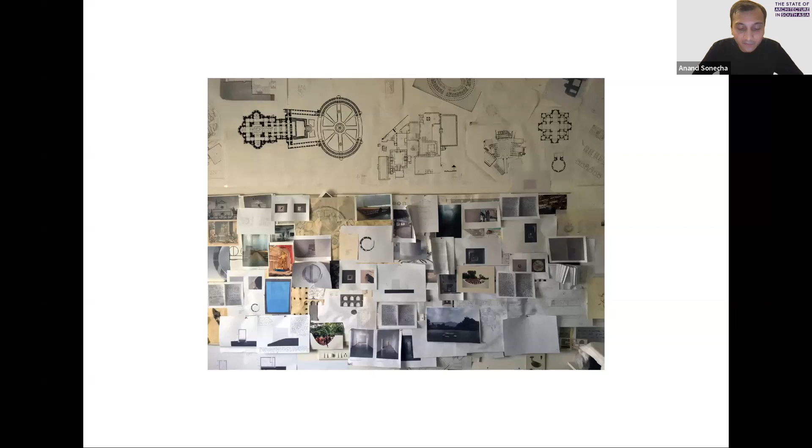Our architecture practice began with projects in the historic Sabarmati Ashram in Ahmedabad, where Mahatma Gandhi lived and led the struggle for independence for 13 years, from 1917 to 1930. Manav Sadhana, an NGO based in the Ashram, gave us our first opportunity. This was the house where Mahatma Gandhi lived, Hriday Kunj. In 2017, we built a small theater, a place for performances for children, as part of 100 years of the Ashram.

With this project, we had an opportunity to work in a complex historical and natural context. We worked with frugal resources, built a simple place, striving to be open for all, young or old, rich or poor, where one can be together or alone.

I will not present this project in detail today, but some approaches and learnings from this project remain consistent in our later works, such as frugality, building the essential, rigorous engagement with the place and people, working slowly, and a quest for beauty for everyone.

Today, I'm going to show two projects: a School for the Blind and Visually Impaired Children, and a housing for a community in Wastal that we completed recently.

Blindness is a spectrum, and it is rare that it is absolute. Only 15% of people with blindness see nothing at all. The majority of people who are blind perceive light and color, while those with different impairments have varying degrees of usable vision. Approximately 39 million people are blind in the world, and India accounts for 20% of the population who are blind, which is around 8 million.

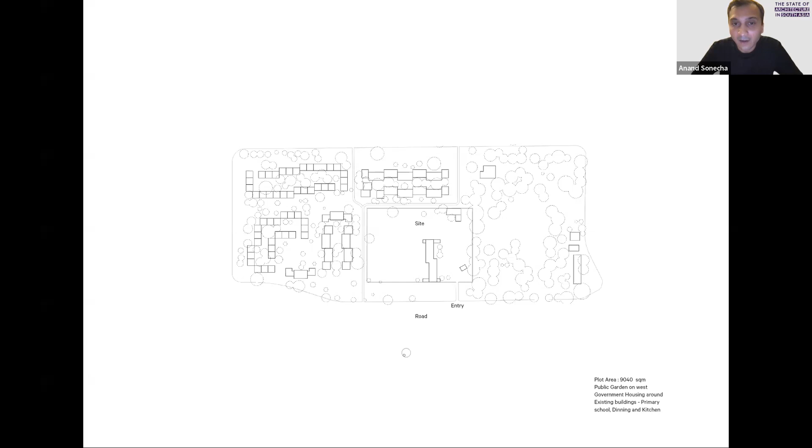On one side, on the west, there was a public garden, and around it were the government housing.

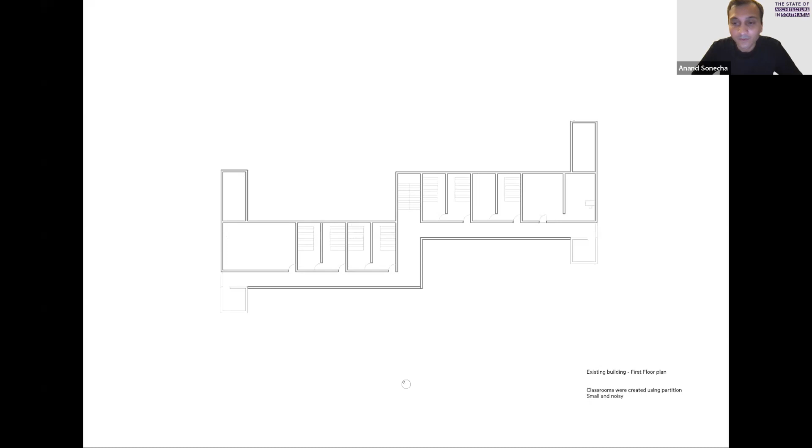This is the existing plan of the existing building, where girls and boys lived on the ground floor, where in each room there were 12 to 14 students living, and it was very inconvenient. And the school ran on the first floor, where classrooms were created using partitions. They were small and very noisy.

So the brief was to design a new school with 10 classrooms, a music room, and renovate the existing building into hostel facilities for blind children to live comfortably. In addition, the hostel facility aimed to invite young students studying in Gandhinagar and senior citizens who live alone, for a mixed community living.

The location that we got had very large dimensions, 81 meters by 57 meters. And there was this existing building on it. And we got this project in 2015.

We didn't have many references of schools. There are some schools designed specifically for blind children, but we didn't come across many that could be a reference. So we started very intuitively with ideas of linear movement with no edges, or a school in a contained garden which is safe and accessible. These were some preconceived ideas that started this project.

We were also thinking of classrooms as individual cells, because the budget was a constraint, so it could be developed incrementally. I was also thinking that if each classroom could have a different character, different shape and volume, it could bring different light and experiences for the children.

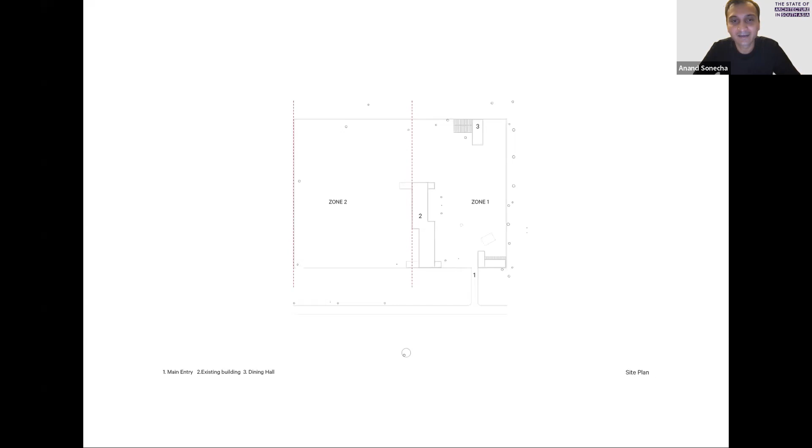After I came back to India, I re-looked at the project and restarted with these new learnings. Some ideas remained consistent, but new ideas also emerged, like the contained garden with movement space around it, which I felt was necessary because of the size of the plot - so students wouldn't get lost. I also started looking at the movement spaces at different scales.

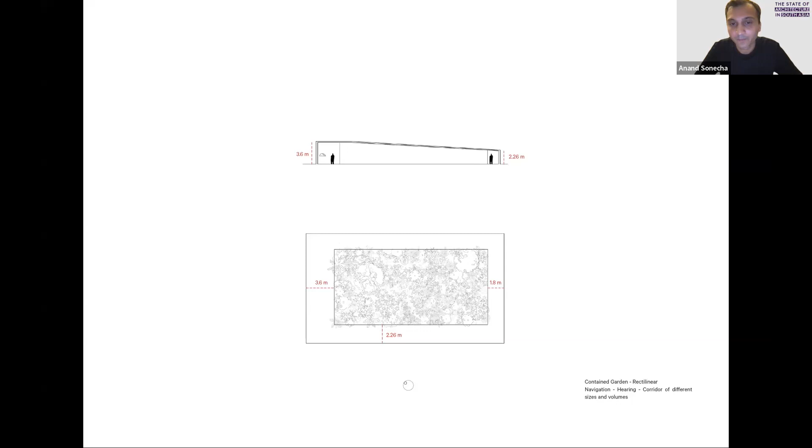So the volumes at the entrance created a wider corridor with a wide and tall height, versus the opposite - a very narrow space with a low volume - that could create a very different sense of sound and echo when students move, because they use clapping as a way to navigate spaces.

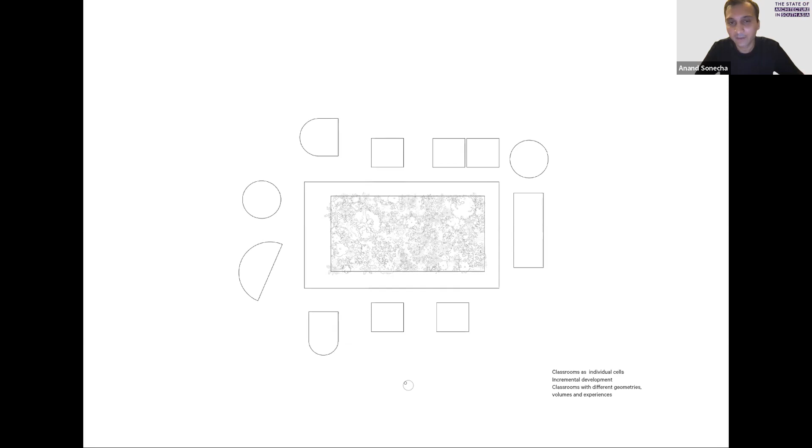Also, the idea of classrooms as cells, which could be incremental, built over a period of time, that remained consistent, but with different geometries and different experiences.

So the project is a very simple geometric building, which revolves around a central courtyard, where there are special classrooms which have a lower ceiling height and the light being brought from the top.

And there are other classrooms which have private courtyards with specific plant species, each with a unique character of its own. Also, the corridors - we were thinking of treating them with a different colour so it can become a point of identification for students.

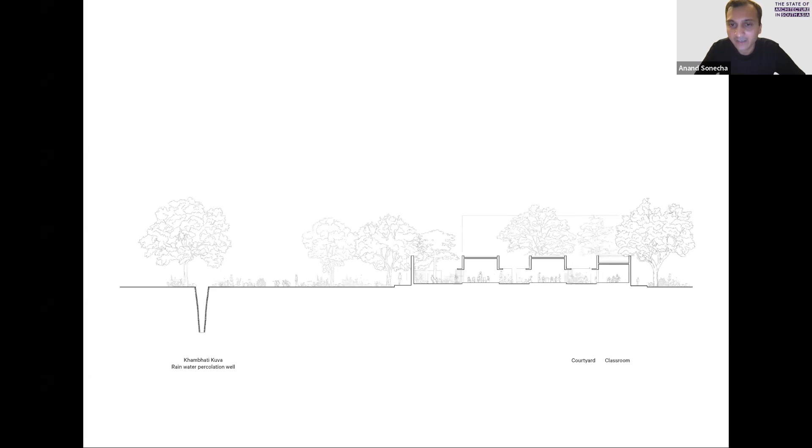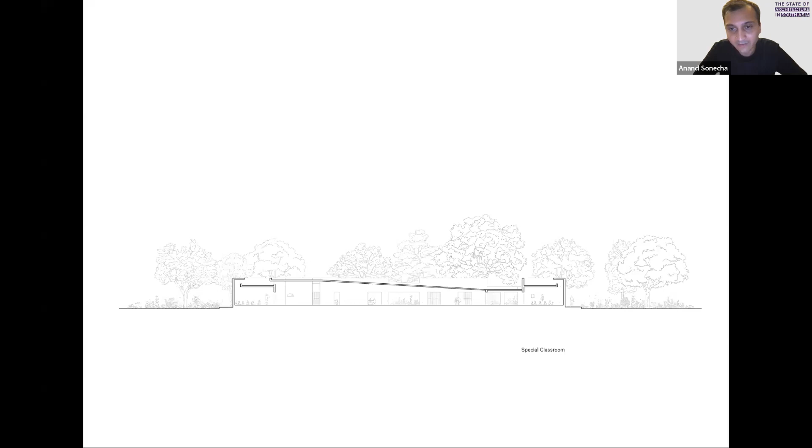This is the section through the special classrooms I was mentioning, where the light is brought from the rooftop, and the entrance corridor gently slopes down to a narrow and smaller side on the opposite end, which creates a very different sort of experience for students.

You can see there are very few openings on the periphery of the building. The openings you see are openings to the courtyard, because diffuse light was very important for low vision students - they get really affected by direct light, and it could become very uncomfortable for them. So there was a constant effort to think about what would be an appropriate light condition inside the classrooms.

We also thought that light could be an element which also gives signs. For example, we thought that the entrance of the special classroom could be a tall volume where light is brought in as a light shower, so it creates a contrast on the surface where students can also perceive the entrance of the classroom.

Whereas we also thought of light as a focal point, that where it also guides you towards, it attracts you towards the other side.

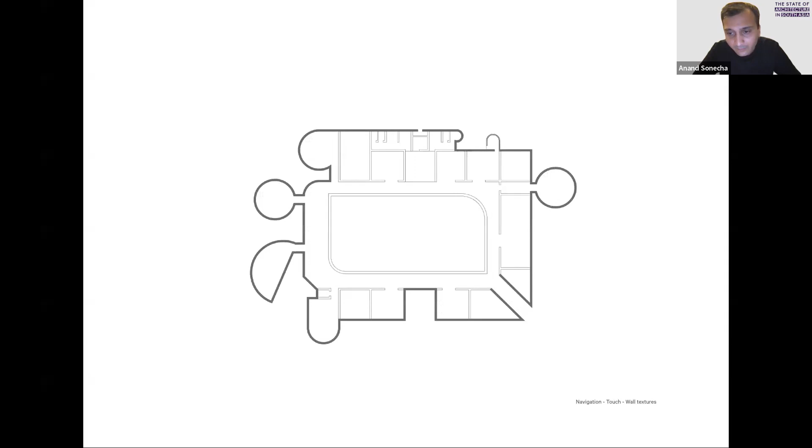Wall texture also became very important for navigation. On the entire periphery, there is a sand-faced plaster, so students can understand the spaces outside and inside. Whereas inside has a different texture, the classroom wall adjacent to the classroom has a smooth texture, whereas the courtyard wall has a semicircular texture. This is a contained open space, so there is a difference. Students can understand the difference between the outside sand-faced plaster versus this.

In which direction the student moves, that was another question. On the horizontal longer surface, we used plaster with longer grains, whereas on the shorter side we created vertical textures, so students can identify whether they are on the shorter side of the built form or on the longer side. These are the textures that we tested out on site, with great effort from the contractor. We made several samples, students tested them out, and we could get accurate grains after a lot of testing.

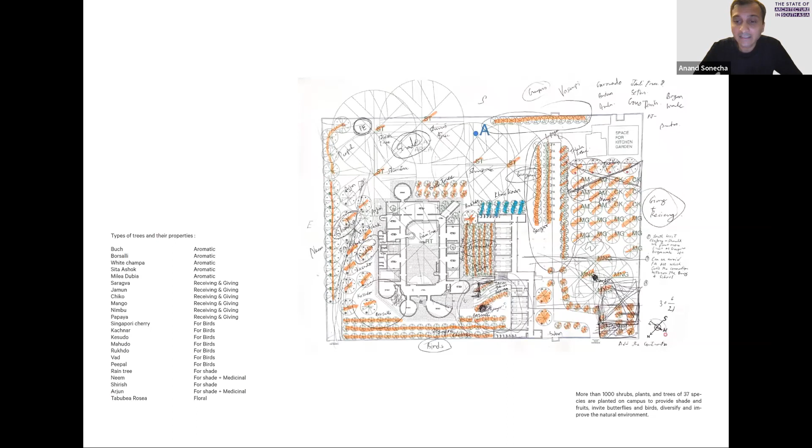Landscape was also another important strategy. Lokendra Balasarya was the landscape architect for the project, and more than 1,000 shrubs, plants, and trees of 37 species are planted on campus to provide shade, fruits, invite butterflies and birds, and diversify and improve the natural environment. Each classroom opens to a private courtyard with aromatic plants and trees, and aromatic trees with specific foliage were selected for the courtyard to allow natural light into the classrooms.

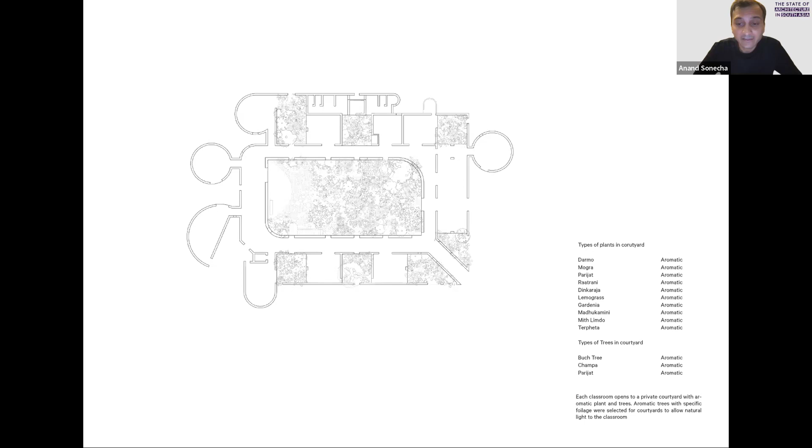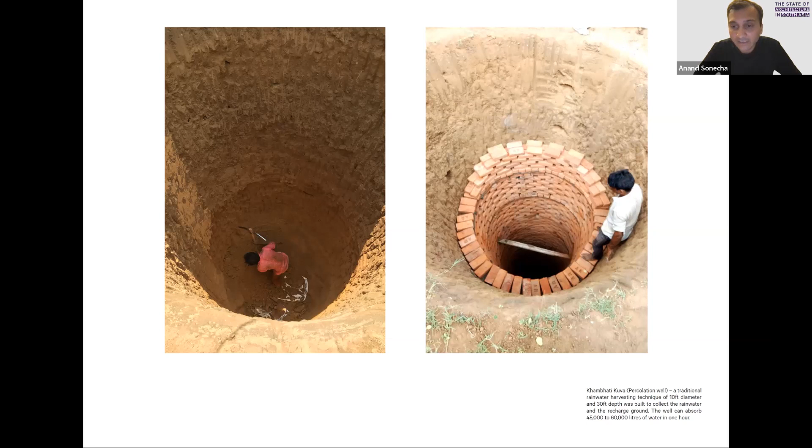I'm going to show now a few photographs of the school, although I feel that this project needs to be experienced in person. These photographs do not give a very clear understanding of the experience of the place itself, but I'm also going to show some speculations which might help understand how students would experience the space. I'll just describe one photograph in detail, then go quickly through the others.

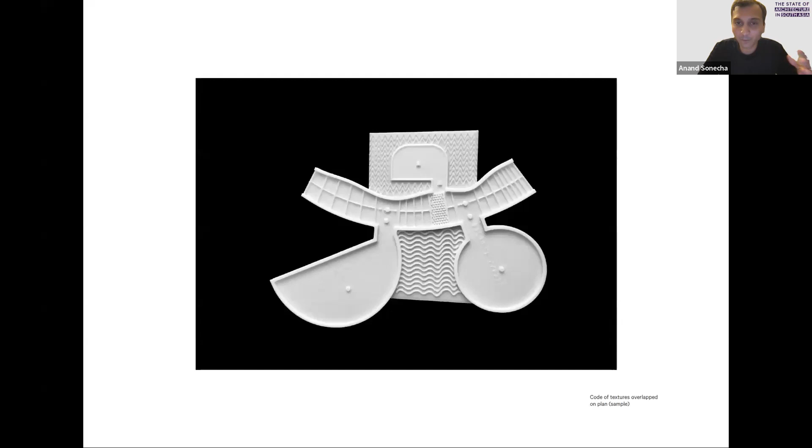Communication was something very important for us in this project. Initially, we started with communication using cardboard models with teachers and students, but they had difficulty understanding the interior spaces. So we devised a code of 3D printed textures which we overlapped onto the plans, and tried to create tactile drawings. There were a lot of trial and errors we did with the students to make sure they understood the spaces we were trying to create.

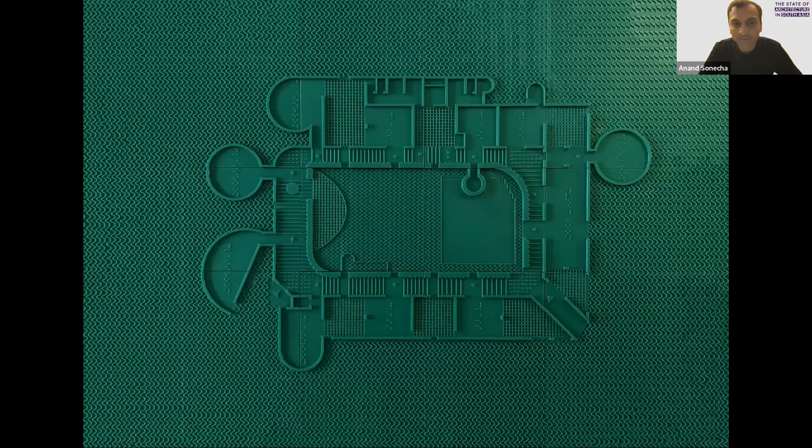We also understood that students are very scared of cardboard models, afraid that they might break. So we made these 3D printed models with furniture embedded, so every detail could be understood by students and teachers of how their classroom might be. And this is the latest drawing that we made.

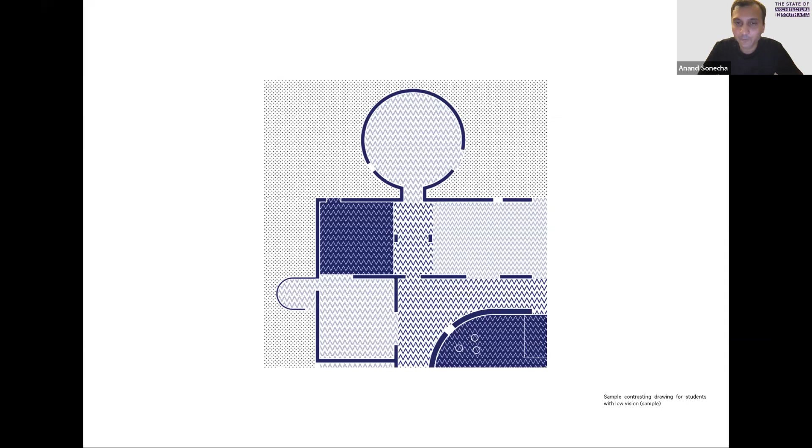We also tried out different contrasting patterns and colors for students with low vision. These are some sample drawings we created for students with low vision. Of course, these are still work in progress and need more studies and research, but we were trying out if this could be helpful in the communication process.

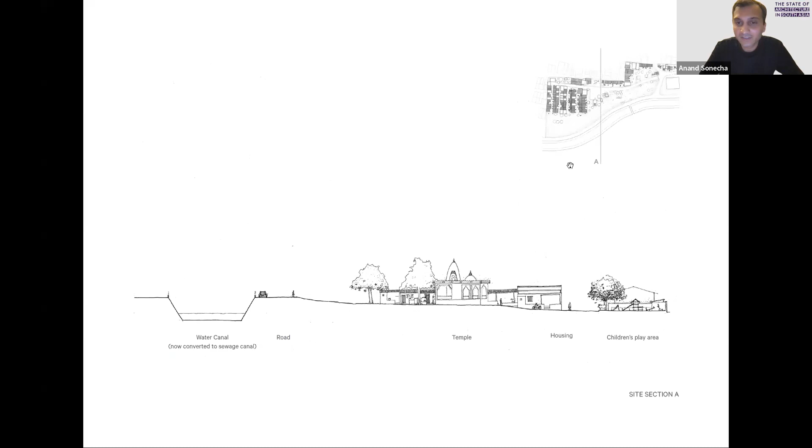Earlier it was surrounded by farmlands, but now due to newer development and surrounding compound walls, this whole community has become like a saucer. So this is the plan, and the major housing is here, and the slope goes towards this side, and there is a huge compound wall which has been developed, and it doesn't let rainwater go away.

Just to give a sense, the community is located in Vastral, which in 1968 was an outskirts. Now it has become part of the Ahmedabad city.

So people from the community identified 55 houses which needed immediate rehabilitation. With the lottery, we have built 13 homes in the community, step by step, assessing, learning, and improving from each one. Each home has been designed uniquely with rigorous engagement and dialogue with the end users, understanding the aspiration, number of family members, and occupation.

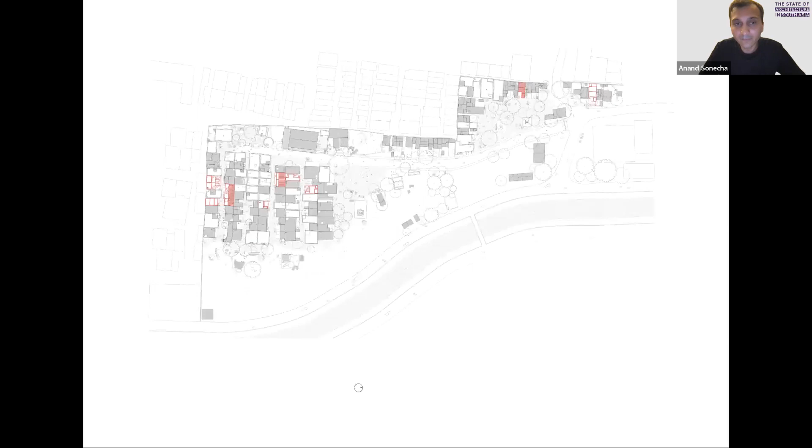These are the houses that we have constructed, but I'm just going to show two to give a sense about the project. Some of the design concerns were: houses need to be flood resilient, should have natural light and ventilation, should be incremental. We needed to engage contractors and fabricators from the community itself, and build the house with a budget of 4 lakh rupees.

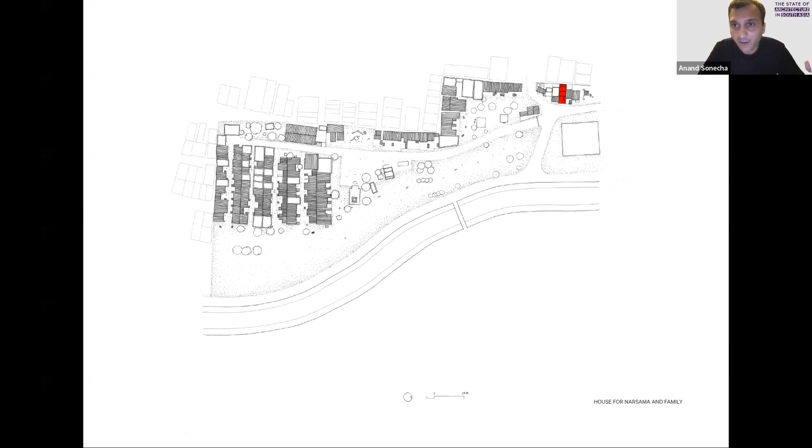So the first house that I'm going to share is of Narsama and her family. She's a widow living with 2 children. This was the house with 1 room, no natural light and ventilation, with an asbestos roof. In the section, you can see how the levels were and how it was flooding.

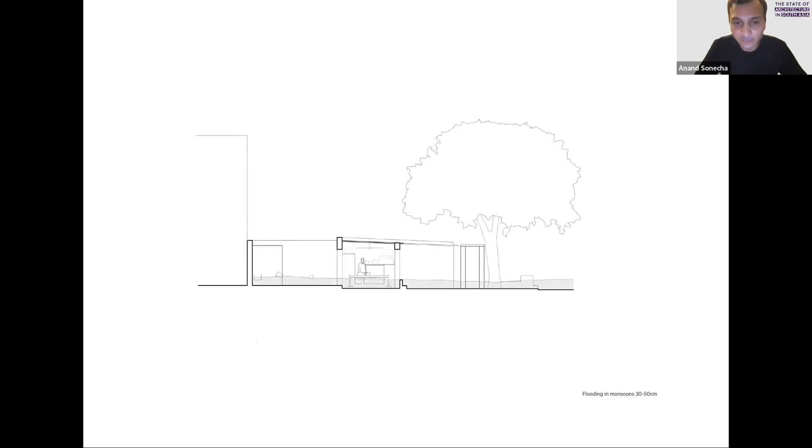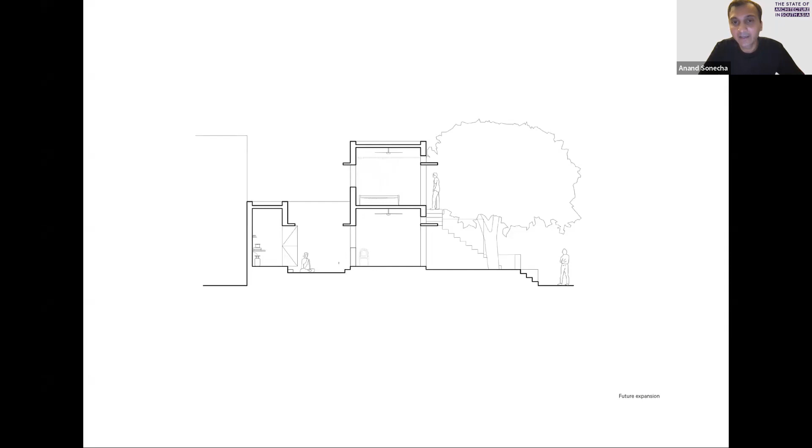So the first thing we did was demolish the existing house, and with the debris of the existing house, we built a higher plinth of 90 centimeters. We built a small room where she can sleep, a cooking area, and a courtyard. We built the foundations in a way that invested a lot of money so that it could be built one story above.

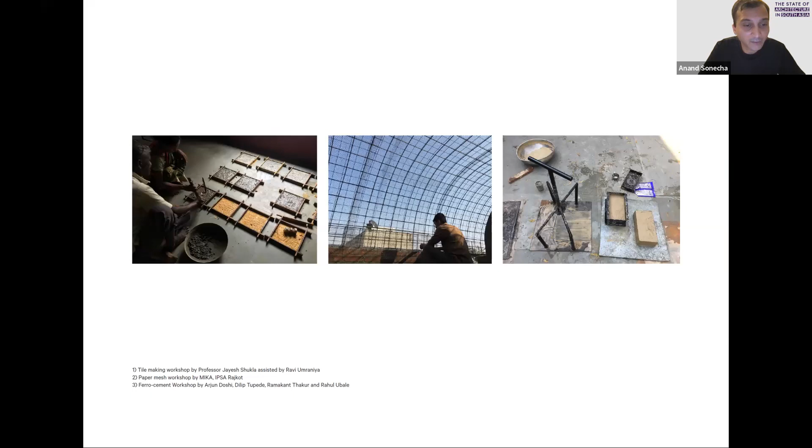We also organized 3 skill development workshops with help of different professionals. Professor Jayesh Shukla and Ravi Umraniya conducted a tile making workshop from waste marble dust. We also invited MIKA students for a paper mesh workshop, and Arjun Doshi for a ferrocement workshop.

I'm not going to go into much detail, but these are some of the sample tiles, where people from the community also learned, and together we used some of the learnings in making of the houses.

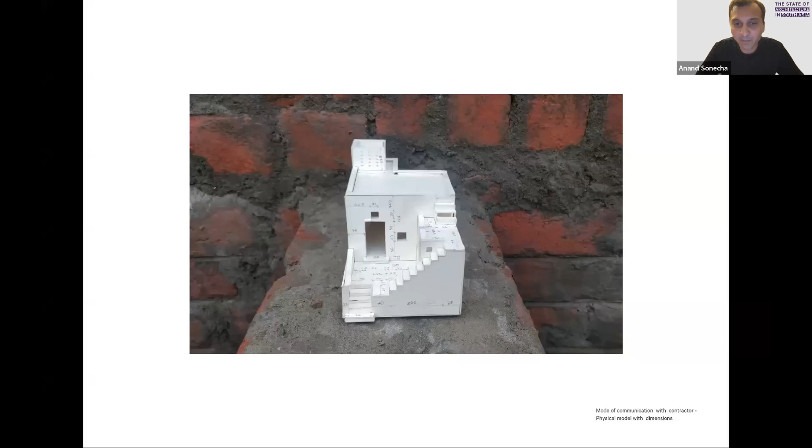Another thing I wanted to share is a change in communication technique. That contractor we were working with could not read architectural or working drawings. So we made models with dimensions, which helped ease communication. This was a great learning experience as architects, that we have to work with all kinds of contractors and find easier ways to communicate.

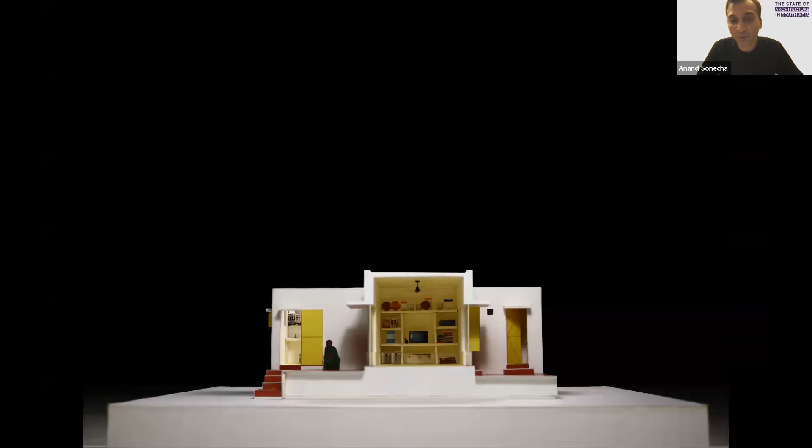Each design was debated and discussed in the community, and these are some of the photographs. We also, for ease of communication, photographed the belongings of the households and showed them.

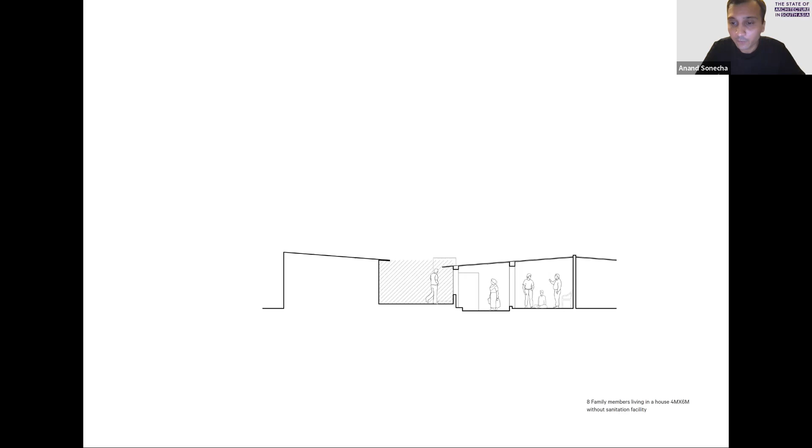The second house I'm going to quickly show is the house for Aruna. The condition of the house was like this: it was below 30 centimeters from the street level, which was 1.8 meters below the road level. There were 8 members living in the house in an area of 4 meters by 6 meters, without any toilets. So our first step was to build a 2-story structure.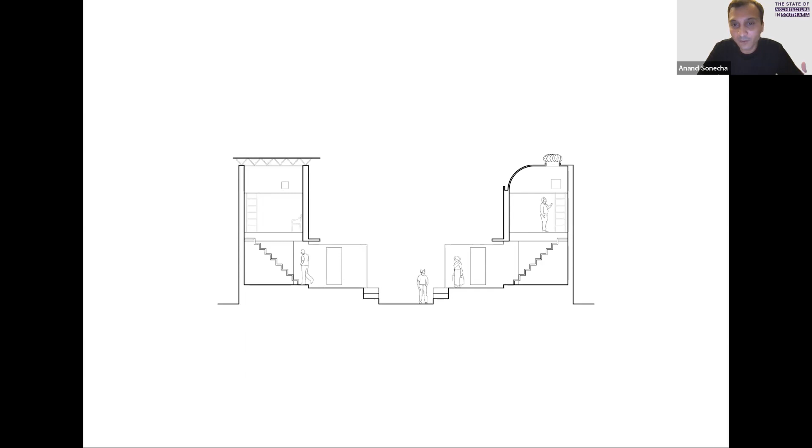We created an open space in front of the street because we didn't want to change the scale of the street. We built a ferrocement roof, staircase, and a loft where children could sleep. When the neighbor also expands in the same way, the character of the street changes too. These are some photographs of the construction.

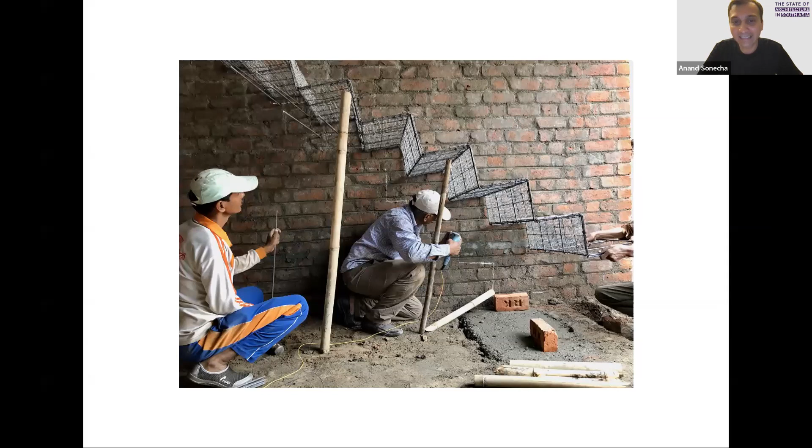Arjun was very generous; he came and taught us this technique, and we were able to build this house with his help. This is the loft, and this is the staircase made from ferrocement.

To be very honest, the grandmother of the house didn't like this house at all, because she related it to a train, since the roof was curved, and she related these doors to industrial sheds.

These are some photographs of the other houses we had built. I'm not going to go into detail here. I just wanted to show these around so one can understand that each house has been thought through according to the needs of the family and the size of the family.

I want to end this presentation with this quote from Naguib Mahfouz for the housing project: 'Home is not where you are born. Home is where all your attempts to escape cease.' And I wish that the people of this community feel this as their home.

I also want to acknowledge the fact that nothing can be done alone, and these are the people who were involved in making these projects. Thank you very much for listening patiently.

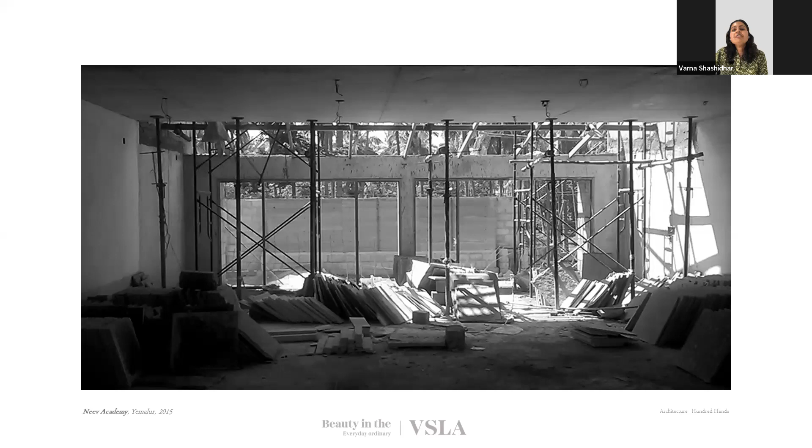While landscapes in India are atmospheric and actually touch the chitta, or soul, the reality of urban landscape and space that landscape architects encounter every day is based on densities and property prices. These were the remnants, the space we encountered in the design of Neev Academy, a school situated in Bellandur in Yemalur, located on a 0.5 acre, very, very small site.

This was a primary school designed by 100 Hands Architects, and the amount of open space left as part of the landscape was actually very, very limited. So the idea was to really look at education as creating a series of micro environments that the children would encounter—a series of grittiness and infrastructure, rather than experience with nature or anything more profound.

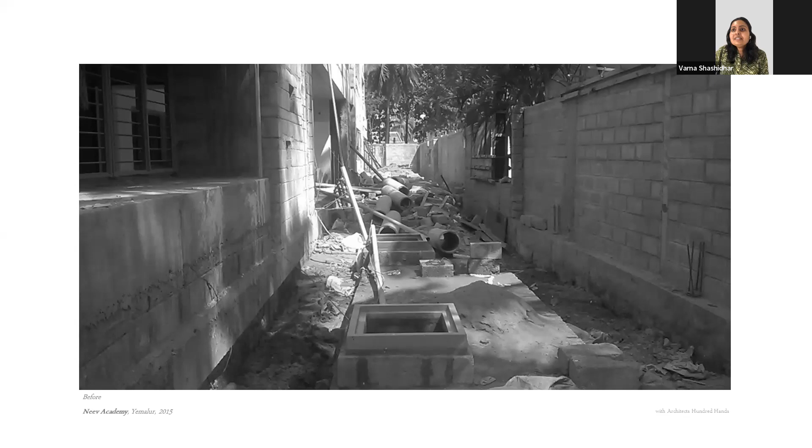These were the setbacks, the open slivers that were part of the design. The idea very quickly was to create these environments that the children would encounter. There were 4 or 5 different environments based on what they observed daily—this was an aquatic court, which provided an entry into the school, with a shallow depth of water, creating an aquatic environment that would also form a didactic space for the children.

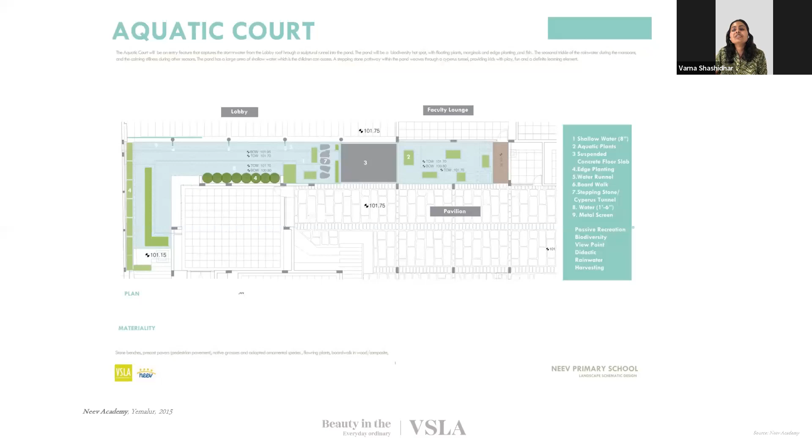There were ideas of creating a dry stream bed that worked with ideas of physics, and children would encounter the space as a landscape of engagement. It would also teach them physics in terms of fluidics and different mechanics of dealing with water, whether it was a rotating wheel.

The sheer complexity of constructing my first landscape in a very tight environment involved working with craftsmen and local material, in this case Chapadi or gneiss rock, creating an environment that would operate when the children operated a hand pump. It would teach them about these ephemeral qualities of landscape, but also serve as a teaching tool.

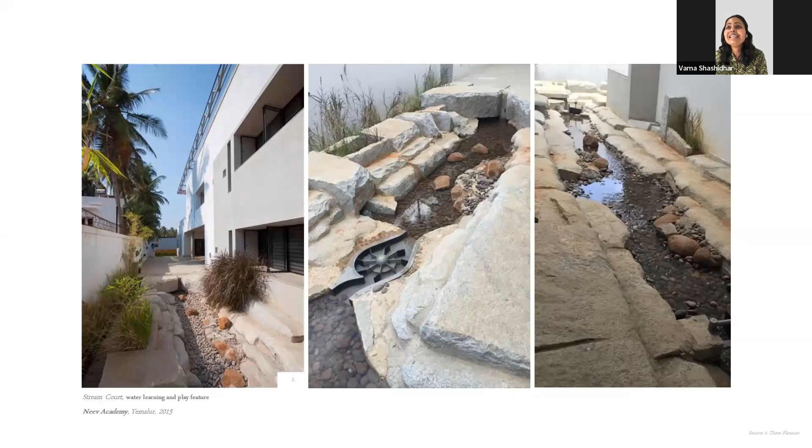The challenges in this project included how to negotiate bringing in 100-ton blocks of stone, and how to deal with the kind of timelines India encounters. It was a project that had to be built in 3 months, negotiating the logistics as a first project while creating a didactic and ephemeral environment for the children.

This is briefly how the children encounter these landscapes. There's also a desert courtyard, and courtyards that take you through an edible garden and various environments which become part of their syllabus, and also something they encounter and learn from daily. The whole school works on the idea of permaculture, and although it's a very tight environment, the children have the opportunity to partake of and really encounter the landscape.

The second project I would like to share is a public project, Bangalore International Center. It's located in a very dense environment, in Domlur. It's a remediation landscape, and the site is just about an acre, surrounded by derelict open space and army grounds on one side. The sheer density of the neighborhood is something to encounter, along with noise factors of 80 decibels.

The other main thing was the fact that it adjoined a nala, a very polluted nala, and degraded soils on site. These were things that were very pressing. The nala is highly polluted, with a discharge of raw waste.

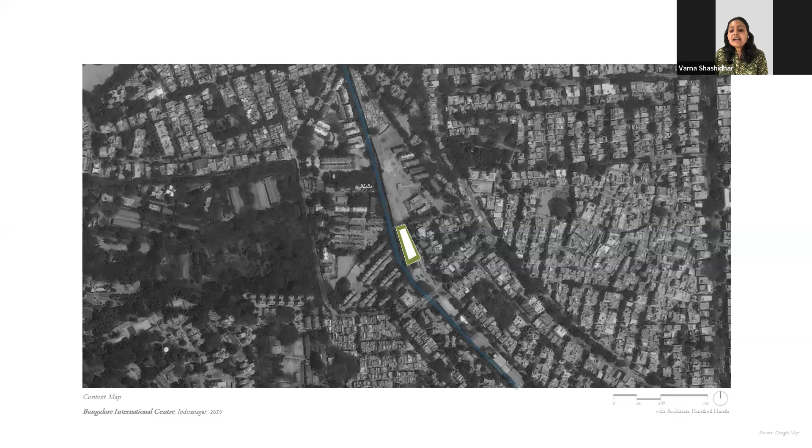The key idea was really looking at improving this space and providing an amenity to the visitors and residents of this neighborhood, and mitigating any further pollution to the nala. The entire institution is a vibrant public institution for cross-cultural dialogues, across religions, regions, and societies. The space is visited by hundreds of people every year.

What was actually a really, really narrow space, because the programmatic built requirements within this project was extremely huge. It included a 185-seater auditorium, seminar halls, cafes, and galleries, leaving very little room for landscape.

So the idea here was to really look at the notion of borrowed landscape, creating riparian corridors and a very public nala corridor. With very, very low depths of water, the idea was to create a biological pond that would connect into the neighboring derelict park landscape, providing an expanded sense of the environment for the people. It was also used as a mechanism to block out the neighboring noises and traffic sounds.

The entire landscape towards the entry is looked at as a linear corridor that connects with the building and scales it down, creating a whimsical front to the building, but also acting as a biodiverse pollinator garden. These spaces become pause spaces during performances. It's also a space for installation and for people to congregate.

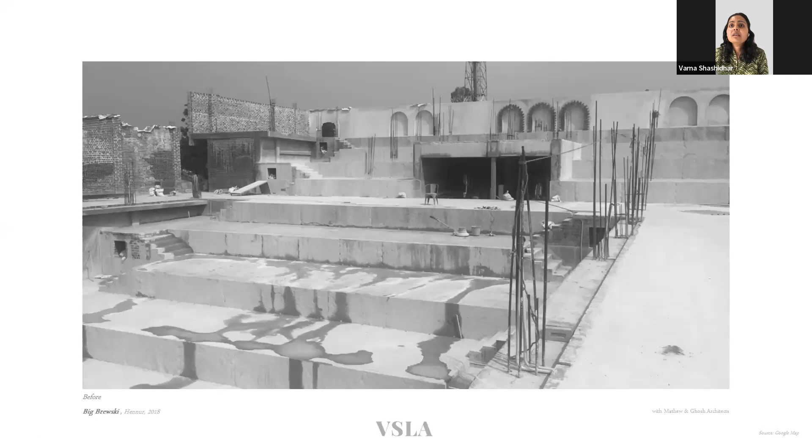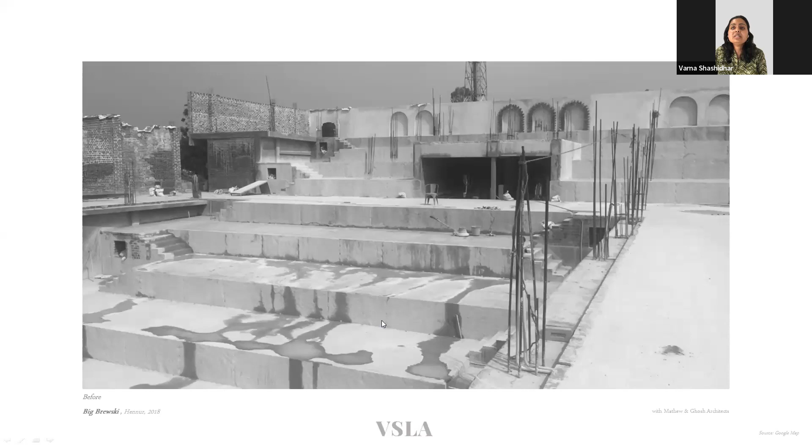The challenge was that it had a lot of infrastructure. Basically everything was on slab. Beneath it is large-scale brewing equipment, with really no access to soils, so everything was on concrete slabs.

The idea behind the architecture was really to treat this as a ruin, a ruin that over time develops a landscape layer, a landscape that is also about decay, and therefore about growth. As the building decays, the landscape component emerges and takes over. This was drawn from Indian cultural landscapes like abandoned stepped wells and abandoned water collection ponds, but the actuality was that it was a very challenging project.

As you can see, everything is on slab, so there's no room for any direct contact to soil. The idea was to be very creative about how vegetation, this component of growth, could emerge and take over this condition. There were very few trees that existed on site — these were the existing site trees.

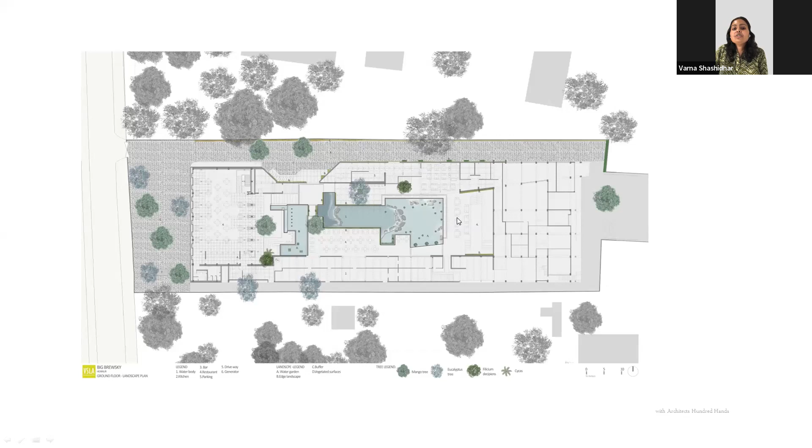Looking at how the plan functions, the overall idea was a large scale, massive flowing body of water, a rapid in the center, with the brewery surrounding this water body. These were the existing trees, and there was hardly any room to incorporate planting.

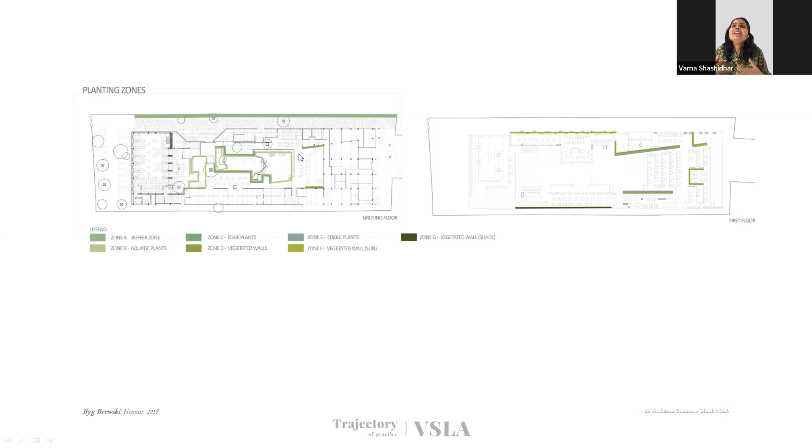At the upper level, the idea was to create moments where the landscape intervenes, looking at how vegetation can function in this harsh, urban, gritty condition. We approached this by creating zones of planting — walls, water, edge conditions, aquatic zones, and vegetated walls — creating different pockets, crevices, and surfaces to form another ecosystem that works at a very micro level.

These were some of the plant species used. Water became a massive component of creating an ecosystem, looking at submerged and emergent vegetation within this area, and really looking at the surface and the boundaries and peripheries to incorporate vegetation.

The idea here was also to use very local plant palettes that people often don't think important. There were about 78 to 80 species of plants, many of them Ayurvedic, forageable plants that could also be used in the drinks, along with river grasses and planting that would grow quickly, occupy less space, but also have a very sensorial component.

These are some ideas of how the planting could occupy space, crevices, and ledges, and then looking at the components of the build to create another layer that is totally underwater — underwater becoming part of the entire experience as people use this space. This is an extremely used space.

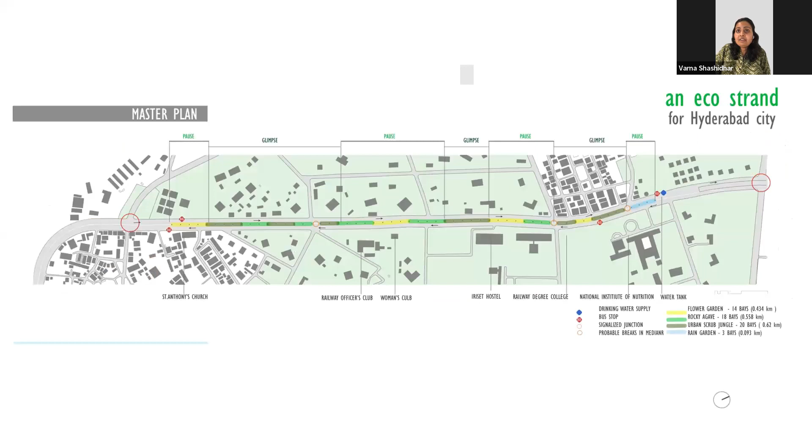So the design process really proposed an ecological strand for the city that would look at Hyderabad's rich geological and cultural history. The idea was to create a green corridor, a connective tissue for the city of Hyderabad that is reminiscent of its geological and ecological history.

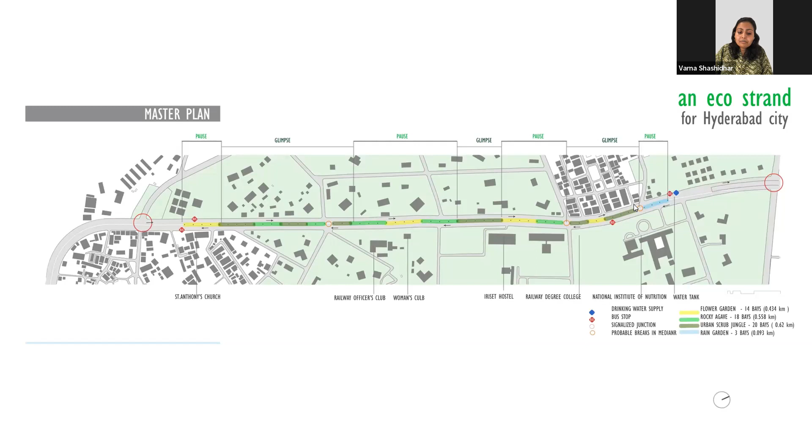So the strand would follow—basically we did studies looking at networks—and the strand would follow the entire metro median corridor. It would act as a riparian zone for urban birds, small mammals, and butterflies, and also serve as an ecological and didactic experience.

We were looking at these gardens of infrastructure where you could glimpse, where you could pause, where you would move fast, and different ways to encounter it. So we had a series of smaller gardens. At micro scale, we looked at the 1.5 kilometer median stretch as a series of rain gardens, rock gardens, seasonal gardens, and urban scrub jungle.

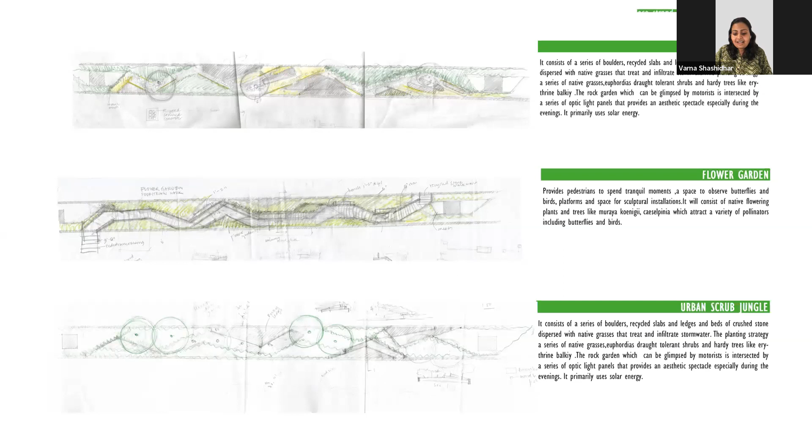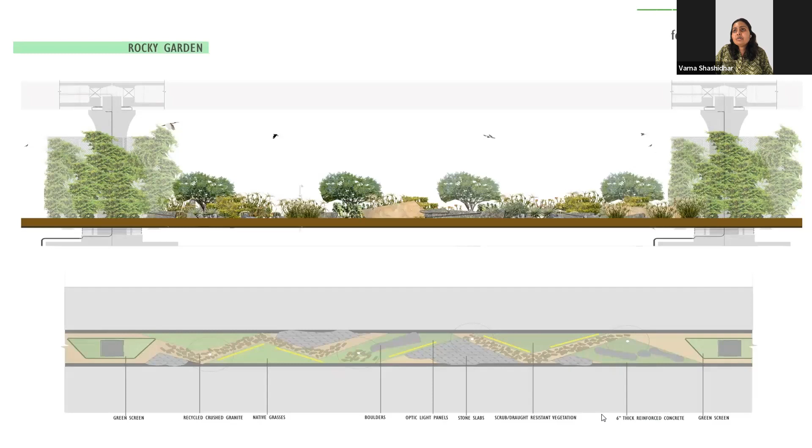These were some of the experiences, looking at the overall stretch and connecting back to the cultural and geological history of the region, trying to keep it drought tolerant, and really making use of infrastructure as a moment to experience beauty.

Some of the other projects we've been involved in include a small park project—a 0.2 acre park—negotiating with the corporators, working with low budgets, and involving the children in the city to work on this.

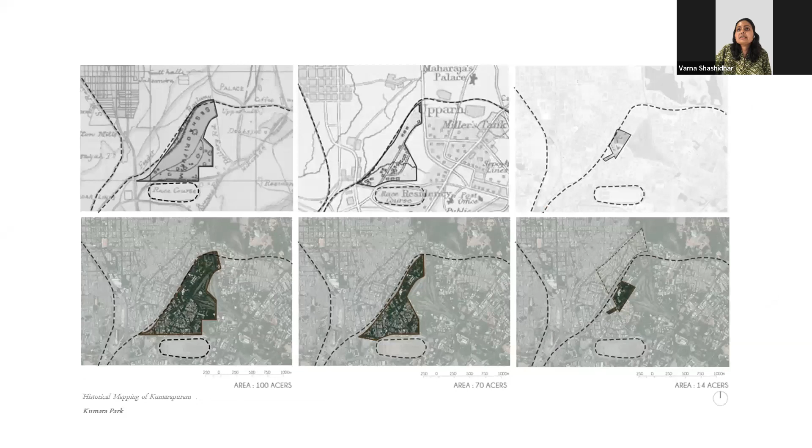We're also involved in pro bono projects such as Kumara Park of the Open Space Collective, as well as village ponds that were self-built by the villagers in Bengal Kuppa, Andhra Pradesh.

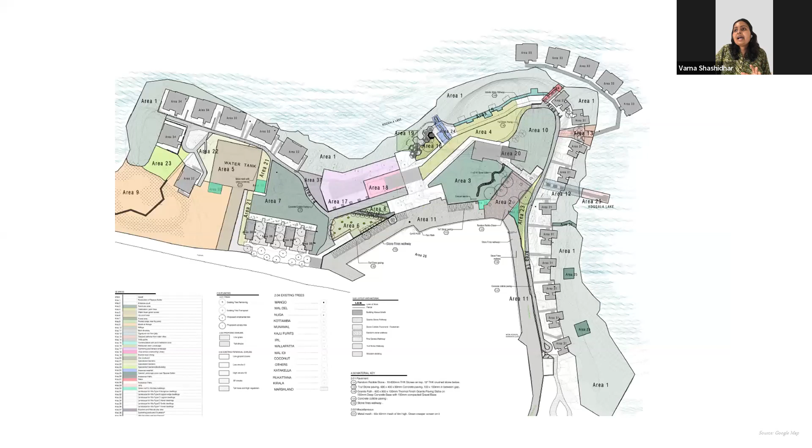And on a larger scale, ideas of ecology, really looking at lagoon environments and cultural landscapes, and impacting the way we build, the way we conserve, and the way we treat architecture in correlation.

The project I would like to end with is an ongoing project: the APF Foundation schools located in Rajasthan, in Barmer, Sirohi, and Tonk.

I'm very fortunate to have had the opportunity to work with Flying Elephant Architects, and we're working on 3 sites in Rajasthan, along with renowned environmentalist and rewilding expert Pradip Krishen. These are located in Barmer, Sirohi, and Tonk. So these are the 3 sites.

I really admire the philosophy of APF Foundation in uplifting education in India through uplifting government schools, especially around India. So basically, these are the 3 sites.

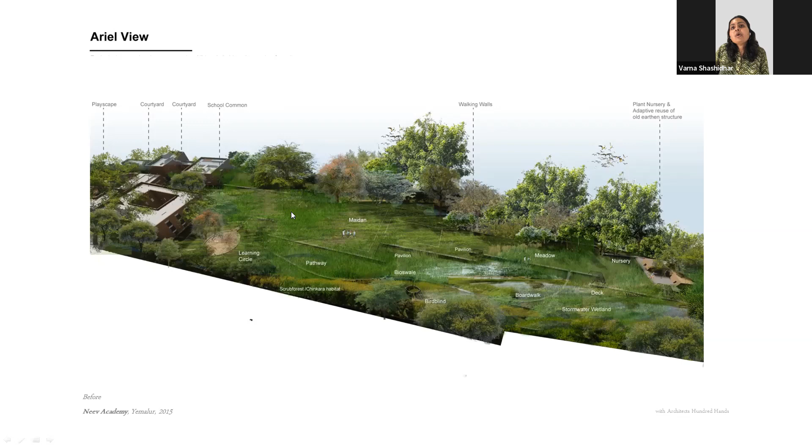We take the children through experiencing a larger landscape that is about experiencing scrublands and Chinkara habitat, and also about wildflower meadows and maidans and smaller level landscapes. So this has been the thought process.

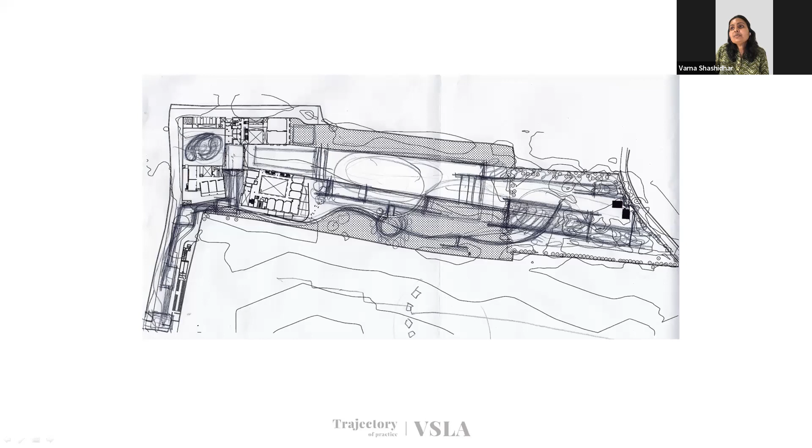The idea was to really look at the school connecting to this 7-acre large, wide, long stretch of land where there exist 2 mud buildings, which we are adaptively reusing as a nursery on site.

To create moments where children can actually encounter and experience various types of vegetation, scrublands, and as they walk through, wildflower meadows and grasslands, encountering spaces and moments even at a micro level.

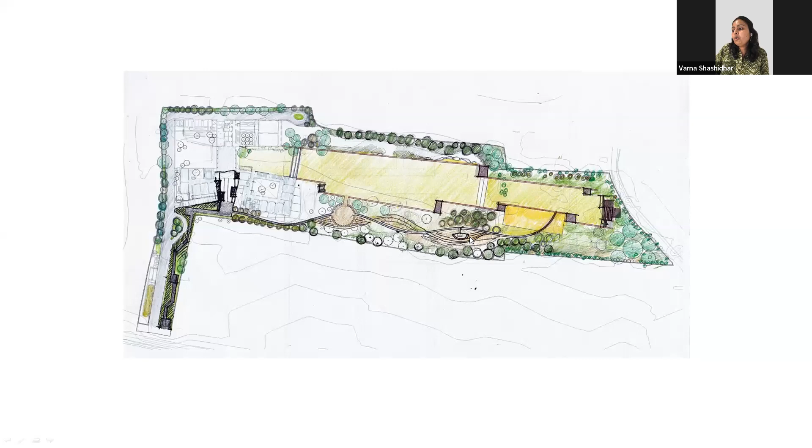The idea is to also look at collection of water, treatment of water, and for all of this to actually become a didactic and ecological amenity for the children.

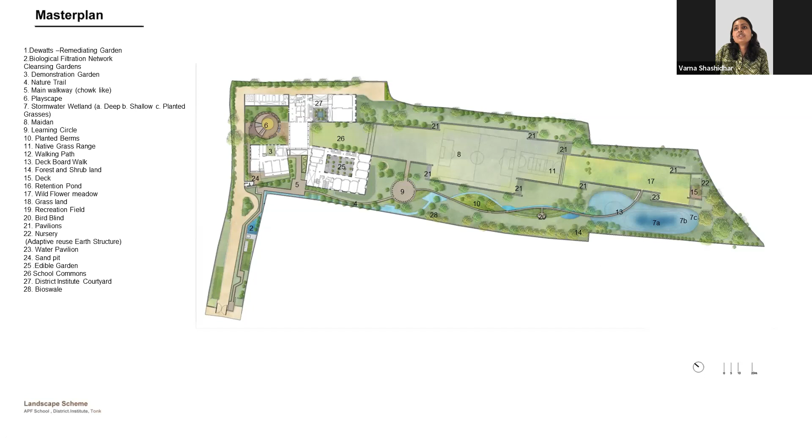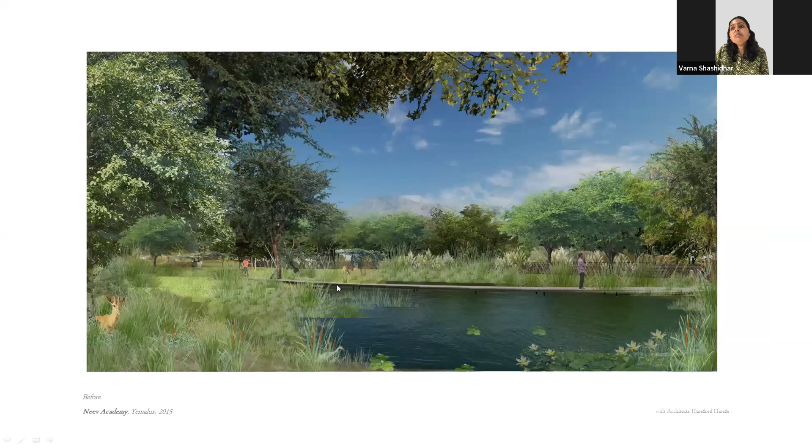So these are some of the spaces that we're creating, with careful study of the vegetation and moments which will take them through and traverse various landscapes.

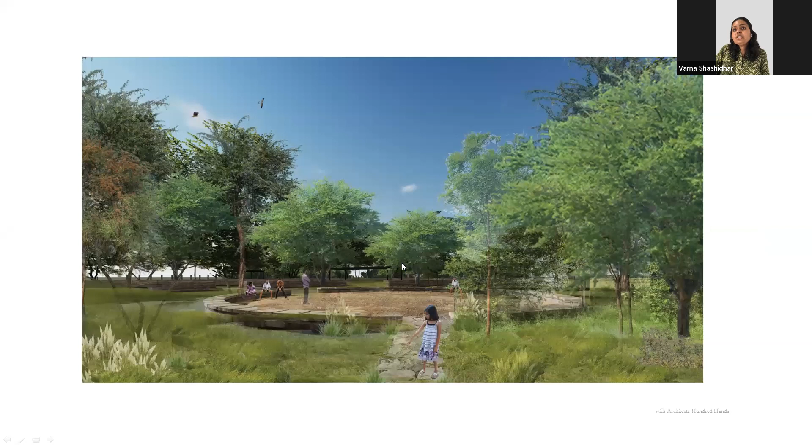The ideas of outdoor classrooms through learning circles, and the language of the landscape derived from the language of the vernacular in Rajasthan and what they encounter.

These are moments where it's actually the school common that opens out into the wetland and wildflower meadows, and the vocabulary for all of this being derived from the land, be it Richard Long's experiments in Rajasthan.

That came from all of the low walls that people encounter, which become a part of creating and defining landscape in the vernacular homes.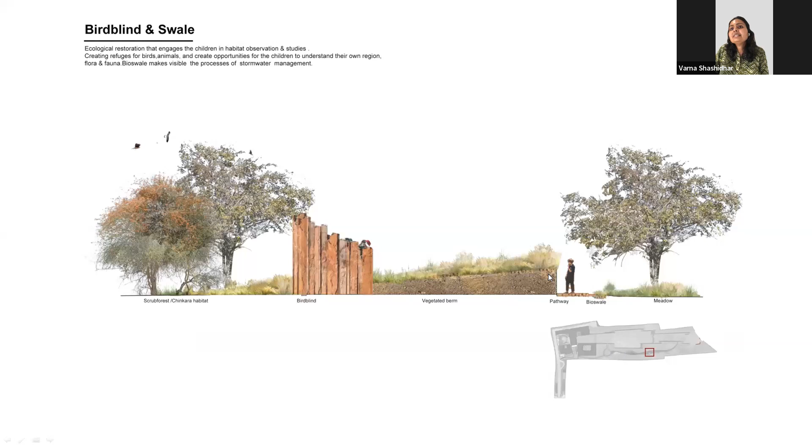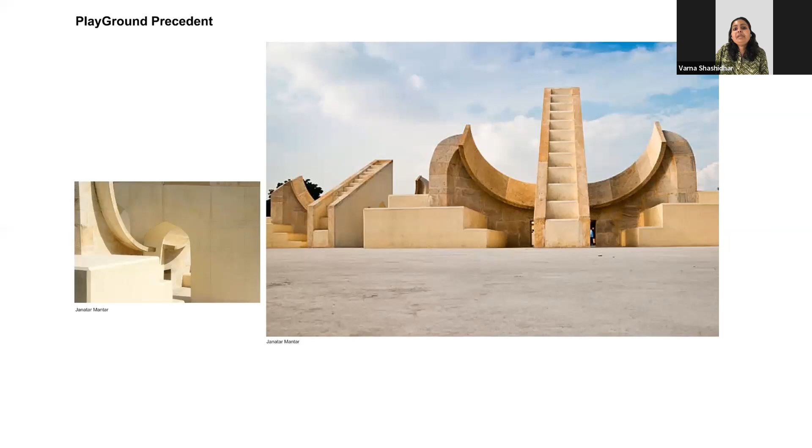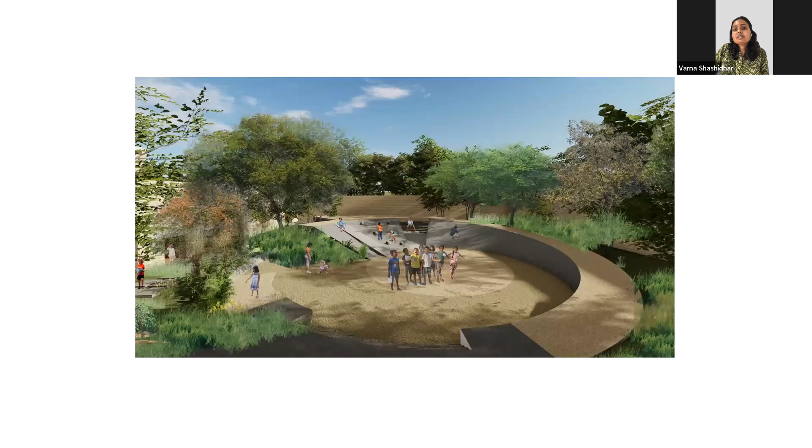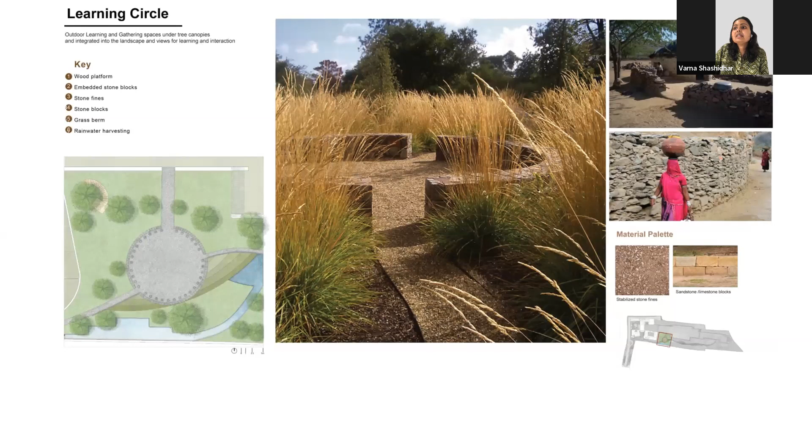So really looking at a series of spaces such as these, which take them through walkways where they encounter bird blinds and the vegetation, wildflower meadows, and a series of studies into the kind of grasses that grow in, and basically formulation of this, and precedents, even with the design of playgrounds, looking at nearby astronomical wonders, basically the Jantar Mantar, and how this idea of drawing from that creates this playscape, which has the background of the Aravalis and responds to this environment, really creating a language of the landscape that is about the people.

That is about the land, that is about the vegetation, what is available. And basically we're working on another school in Sirohi where we really would like for the courtyards to really connect, create these moments which really connect with the larger landscape, but is also very much rooted to the place, whether it's vegetation or people.

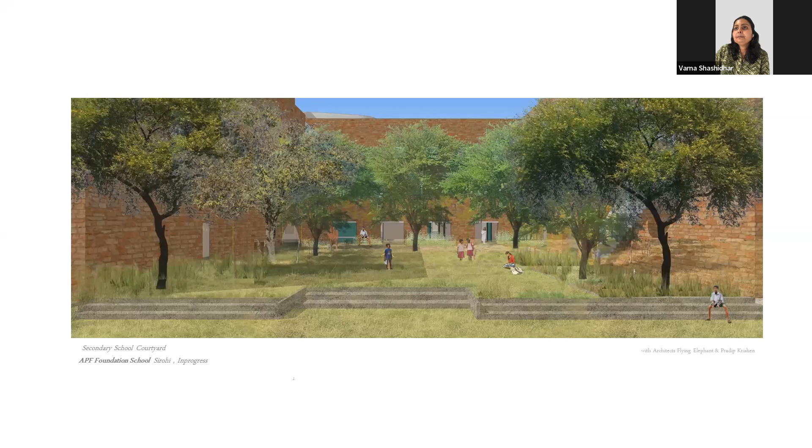Yeah, okay. Thanks to both of you for fascinating presentation. This was really very exciting. I'm thrilled that this is building the way it is, because I think we are all, as an audience and a community, being exposed to new things, new thinking, a whole generation. So fantastic. I'm just going to make a few comments, just my own impressions, Varna and Anand, and then a couple of questions, and we'll open it up for questions from the audience.

Varna, I think, that image of the veranda of Anjalendran's house, of course, was very nostalgic for me. And I think I firsthand also felt many things you were describing about the context. So that was deep nostalgia. But I was struck by a few things which...

Clearly are beginning to define your values and your practice, which are very interesting. And I think your background, having studied at the GSD, something that I'm a bit familiar with, and the shift that has occurred even here, maybe over two decades, where the emphasis of focusing on plant materials has moved into kind of broader concerns of the landscape as ecology, the landscape as situated in a territory, and it's more kind of an expansive ecological definition.